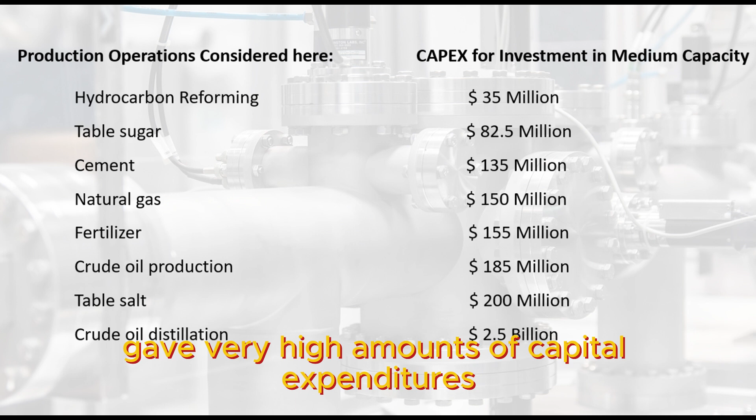The YouTube video titled 'From Molecules to Millions: The Chemistry, Process Flows and ROI of Industries and Their Utilized Raw Materials, Part 1' is the prerequisite for this video. This is because that video gave very high amounts of capital expenditures, CAPEX, for their investment.

It was shown that the cost for a medium investment in these industries, when arranged in order of increasing CAPEX, are hydrocarbon reforming, table sugar, cement, natural gas, fertilizer, crude oil production, table salt, and crude oil distillation, with the actual amounts of $35 million,

$82.5 million, $135 million, $150 million, $155 million, $185 million, $200 million, and $2.5 billion respectively. The amount of money for each process is enormous.

So there is a need to create opportunities for more investors to be identified in the process, such as aiding the investment processes as follows.

1. Reducing the high capex barrier. This involves collaborative financing through joint ventures between SMEs and larger firms, sharing the capex burden.

2. Concentration of risk. A single entity bears the full funding burden, and there are identified delays to break even if any one stage underperforms.

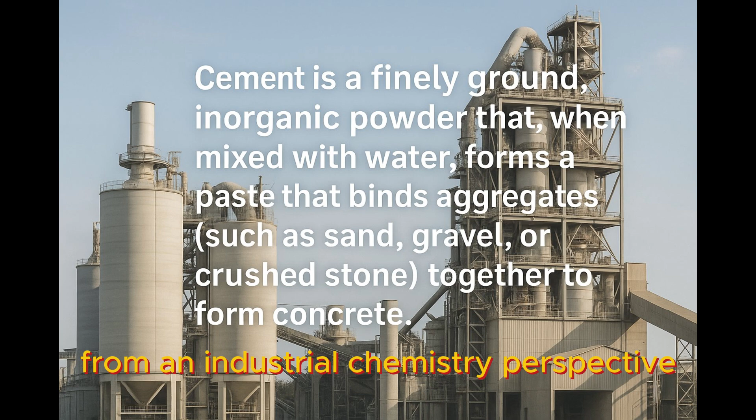From an industrial chemistry perspective, cement is a finely ground, inorganic powder that, when mixed with water, forms a paste that binds aggregates, such as sand, gravel, or crushed stone, together to form concrete.

The processes are as described in the process flow diagram shown here, and stages of production are grouped into 8 as follows: 1. Raw materials extraction. 2. Crushing and grinding. 3. Mixing and blending. 4. Preheating and calcination. 5. Clinker formation. 6. Cooling and storage. 7. Final grinding. 8. Packaging and distribution.

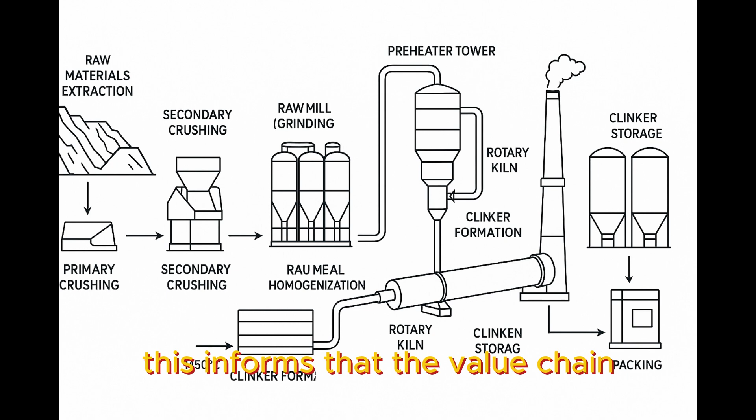This informs that the value chain in cement production will be built across the 8 stages mentioned, as described in the subsequent section. By unbundling these 8 stages, entrepreneurs can plug into the cement ecosystem at the scale they can afford, share infrastructure burdens, and build profitable, capital-efficient ventures with clear exit or scaling pathways.

2.1 Value chains in cement production. 1. Raw materials extraction. Business: quarry and sell crushed limestone, marl, clay for cement feed or construction aggregates.

Processes and operations: geological survey and test drilling, drilling and blasting, excavation and hauling to primary crusher, stockpiling and quality sampling. Equipment and materials: drill rig with compressor, explosives and accessories, hydraulic excavators with 2 to 3 cubic meter buckets, 600 TPH jaw crusher.

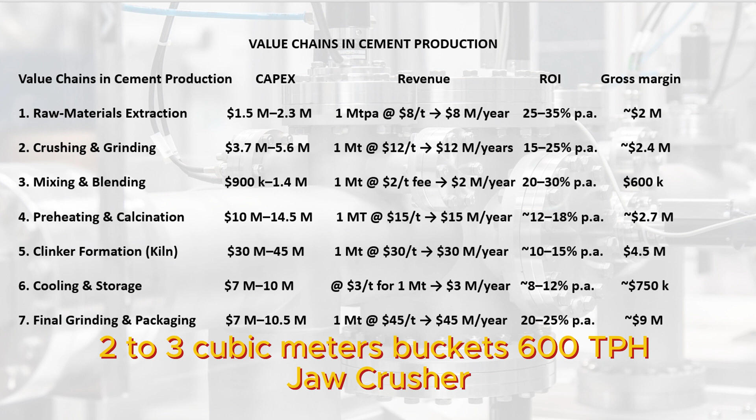2 by 30 T-tipper trucks, quality lab kit, XRF portable. CAPEX: site prep, permits and survey, $300K-$500K; crusher and haulage fleet, $1M-1.5M; stockpile infrastructure, bund walls, conveyors, $200K-$300K.

Total $1.50M-2.3M. Revenue and ROI: 1 million tons per annum at $8 per ton equals $8 million per year. Gross margin 25%, net $2M. ROI 25-35% per annum. Payback 3-4 years.

2. Crushing and grinding, raw meal production. Business: crush and mill raw materials into fine raw meal for cement kilns. Processes and operations: secondary crushing with cone/roll crushers.

Drying with hot gas ring dryer. Raw meal grinding via VRM or ball mill. Airslide conveyors to silos. Equipment and materials: 800 TPH cone crusher plus feeders, hot gas ring dryer at 20 TPH, vertical roller mill at 150 TPH, or 2 by 30 TPH ball mills.

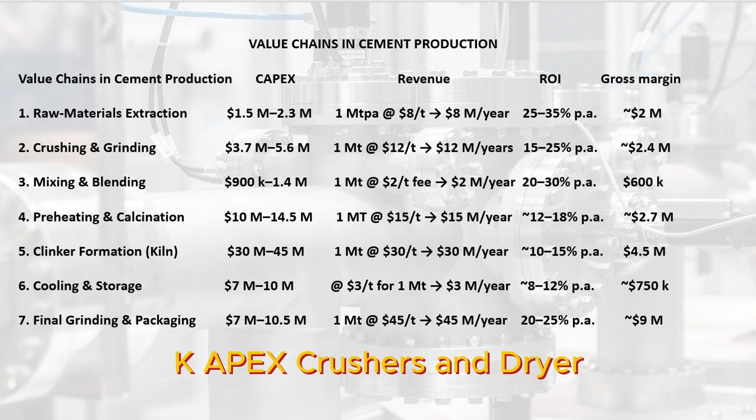Dust collector and bag filters. Control system: PLC plus SCADA. CAPEX: crushers and dryer, $1.20M-1.8M; mills and filters, $2M-3.0M.

Conveyors and silos, $500K-$800K. Total $3.70M-5.6M. Revenue and ROI: sale of 1 million tons raw meal at $12 per ton equals $12 million per year. Gross margin 20%, net $2.4M. ROI 15-25% per annum. Payback 4-6 years.

3. Mixing and blending. Business: supply homogenized raw meal blends or specialty cement additive mixes. Processes and operations: weighfeeder batching of raw ingredients including limestone, clay, slag, fly ash; blending bed or silo homogenization using live bottom silos; sampling and QC for target chemistry.

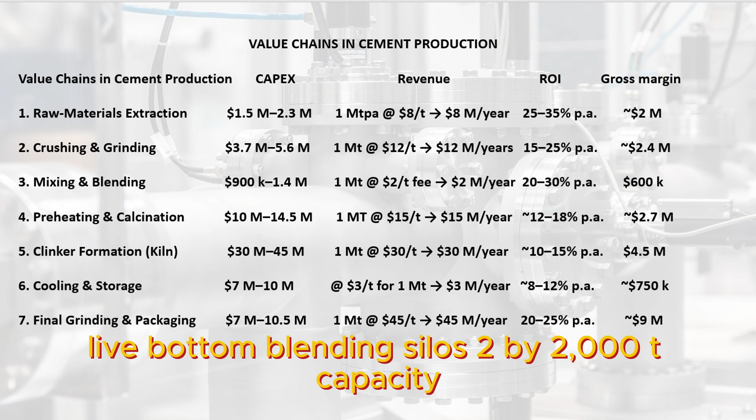Equipment and materials: multi-bin weigh feeders, 4 to 6 bins; live bottom blending silos, 2 by 2000 T capacity; screw conveyors and rotary valves; QC lab with XRF and moisture analyzer. CAPEX: feeders and conveyors, $300K-$500K.

Silos and structural steel, $500K-$700K. Lab setup, $100K-$200K. Total $900K-1.4M. Revenue and ROI: 1 million tons blended at $2 per ton fee equals $2 million per year. Gross margin 30%, net $600K. ROI 20-30% per annum. Payback 3-5 years.

4. Preheating and calcination. Business: operate a precalciner/preheater unit to sell partially calcined feed to clinkerizers.

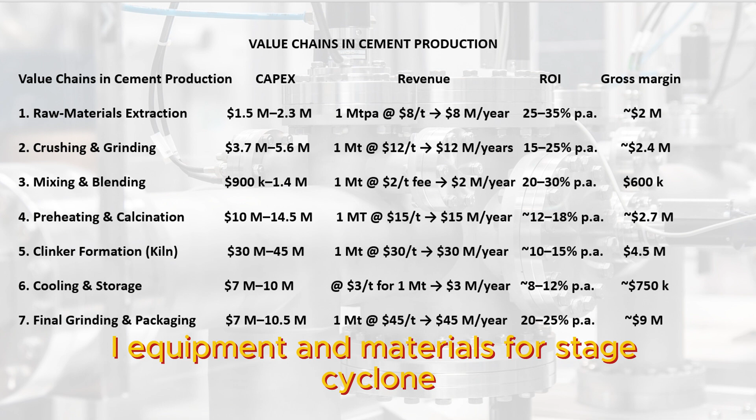Processes and operations: preheater tower with four stage cyclone, precalciner burner for 30-40% calcination, heat recovery to dryers/grinders. Equipment and materials: four stage cyclone preheater tower.

Precalciner burner and ducting. ID/FD fans and ESPs. Structural steel and refractory lining.

CAPEX: preheater tower and burner, $7M-10M; fans, ducts and ESP, $2M-3M; civil and steel works, $1M-1.5M. Total $10M-14.5M.

Revenue and ROI: 1 million tons precalcined at $15 per ton equals $15 million per year. Gross margin 18%, net $2.7M. ROI 12-18% per annum. Payback 6-8 years.

5. Clinker formation, kiln. Business: run a rotary kiln to sell clinker to grinding plants. Processes and operations: rotary kiln, 4 M x 60 M, at 1,450 degrees C.

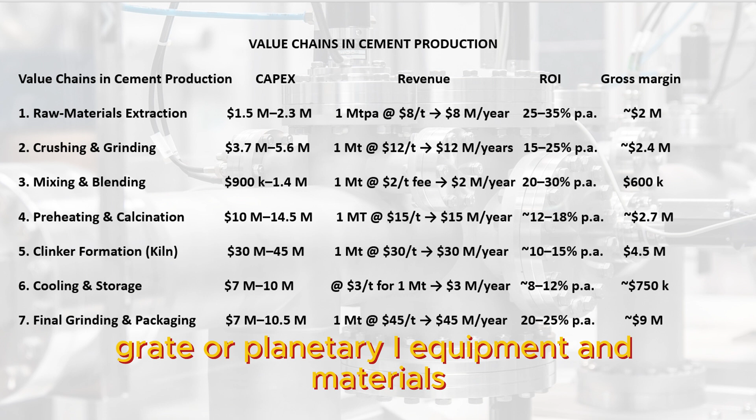Kiln drives, seals and refractory sections. Clinker cooler, grate or planetary. Equipment and materials: rotary kiln shell and drive, preheater and calciner integration, clinker cooler and transfer conveyor.

Fuel system for coal/petcoke handling. CAPEX: kiln and burner, $20M-30M; cooler and conveyors, $5M-7M; civil, refractory and spares, $5M-8M. Total $30M-45M.

Revenue and ROI: 1 Mt clinker at $30 per ton equals $30 million per year.

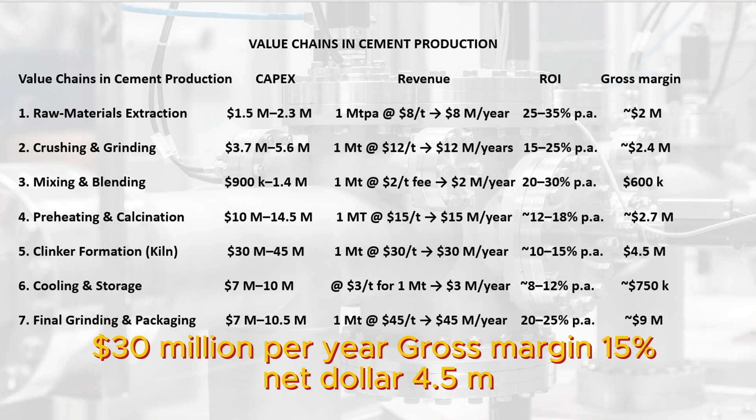Gross margin 15%, net $4.5 million. ROI 10–15% per annum. Payback 7–10 years. 6. Cooling and storage business.

Provide clinker cooling, storage silos, and just-in-time dispatch. Processes and operations: clinker cooler, if standalone, or storage buffer, high-capacity silos, 2 by 10,000 tons. Reclaimer and stacker bridges.

Equipment and materials: grate or planetary cooler retrofit, cylindrical steel silos plus roof and aeration, reclaimer conveyor and stacker boom.

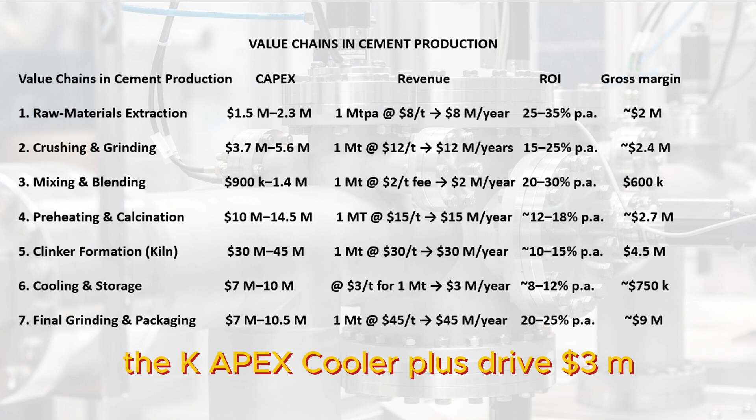CAPEX: cooler plus drive, $3M to $4M. Silos and reclaimer, $4M to $6M. Total, $7M to $10M.

Revenue and ROI. Handling fee at $3 per ton for 1 Mt, $3 million per year. Gross margin 25%, net $750K. ROI 8-12% per annum. Payback 8-10 years.

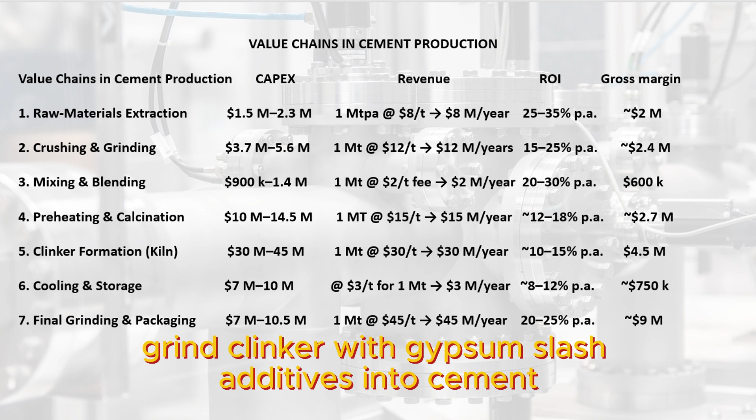7. Final grinding and packaging. Business: grind clinker with gypsum and additives into cement, bag and load for sale.

Processes and operations: finish grinding, VRM or ball mill plus classifier. Cement blending with additives, gypsum, slag. Bagging line, 25 to 50 kilograms, palletizing and wrapping. Bulk loading via tanker/truck.

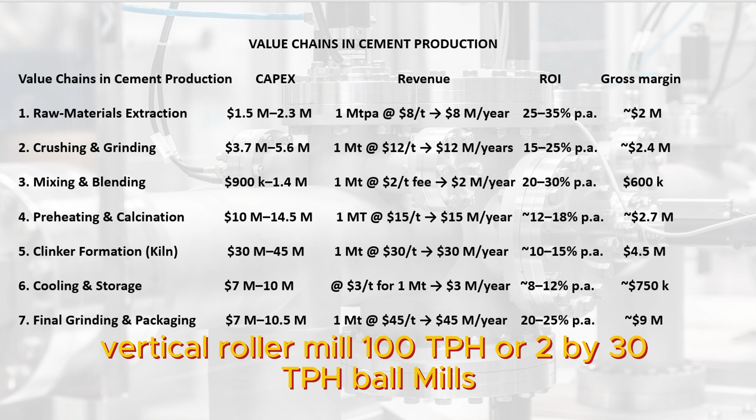Equipment and materials: vertical roller mill, 100 TPH, or 2 by 30 TPH ball mills. High efficiency classifiers and dust collectors. 2 by 20 bag/min bagging machines plus palletizer. Silos, 2 by 5000 tons, and bulk loading spout.

Low-CAPEX. Mills and classifier, $5M to $7M. Bagging and conveyors, $1M to $1.5M. Silos and civil, $1M to $2M. Total, $7M to $10.5M.

Revenue and ROI. 1 Mt cement at $45 per ton, $45 million per year. Gross margin 20%, net $9M. ROI 20-25% per annum. Payback 4-6 years.

3.0 Table salt production. Table salt, also known as sodium chloride, is a crystalline mineral composed of sodium (Na) and chloride (Cl) ions. Its chemical formula is NaCl.

Table salt is commonly used as a seasoning and preservative in food, and it's essential for various bodily functions, such as maintaining fluid balance and nerve function.

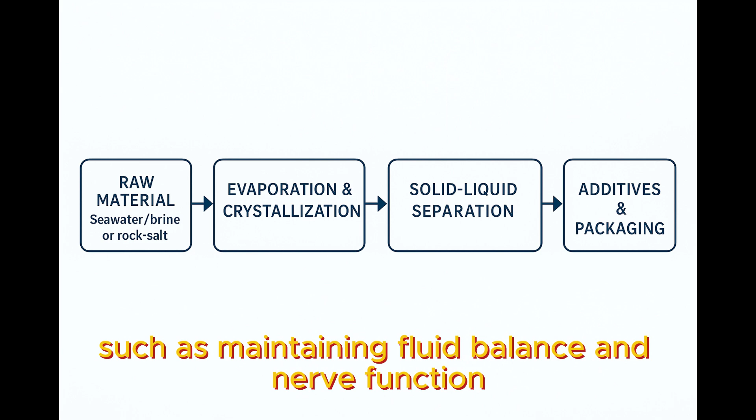The processes are as described in the process flow diagram shown here, and stages of production are grouped into 5 stages as follows: 1. Sources and purification of raw materials. 2. Concentration. 3. Solid-liquid separation. 4. Additives and packaging. 5. Distribution. This informs us that the value chain in table salt production will be built across the 5 stages mentioned, as described in the subsequent section.

3.1 Value chains in table salt production. 1. Sources and purification of raw materials. Produce crude salt, wet harvested or mine harvested, and deliver a washed, low impurity feed for downstream.

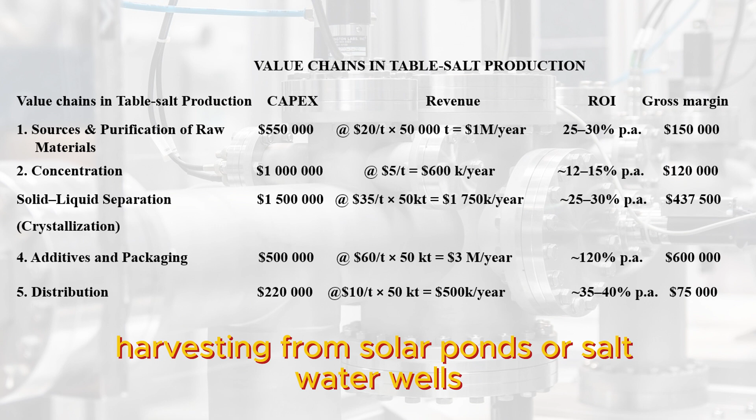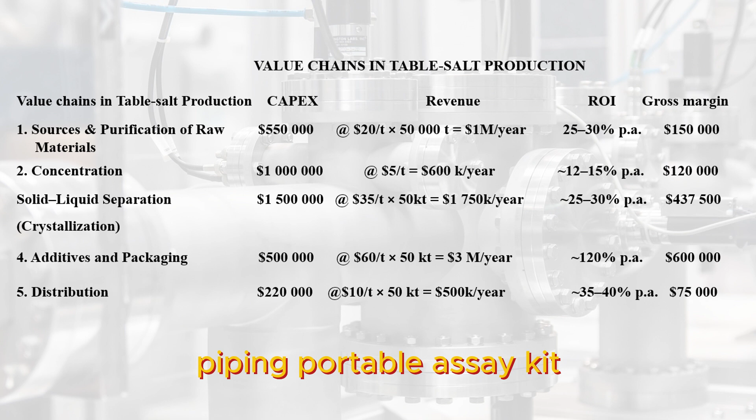Processes and operations include harvesting from solar ponds or saltwater wells, washing and settling to remove clays and insolubles, brine clarification via filtration or clarifiers. Equipment and materials include pond excavation and liners, if solar, or brine well pumps, settling tanks, sand media filters, slurry pumps, valves, piping, and a portable assay kit for conductivity and insoluble solids.

CAPEX, medium for a capacity investment of 50,000 tons per annum. Pond/lease development and permits, $200,000. Pumps and filtration skids, $250,000. Civil works and utilities, $100,000. Total is almost equal to

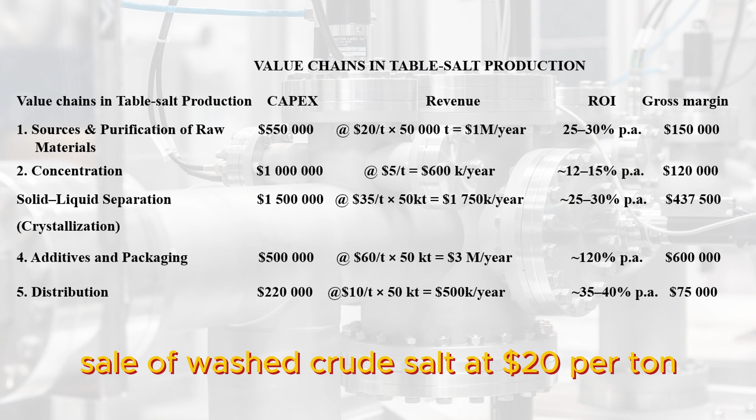$550,000. Revenue and ROI. Sale of washed crude salt at $20 per ton times 50,000 tons equals $1 million per year. Gross margin 15%, $150,000 net. ROI 25–30% per annum. Payback 3–4 years.

2. Concentration. Evaporate and concentrate brine to a high salinity feedstock for crystallizers. Processes and operations: solar evaporation via pond network, or mechanical vacuum evaporation, heat recovery if mechanical, and brine monitoring for TDS and temperature.

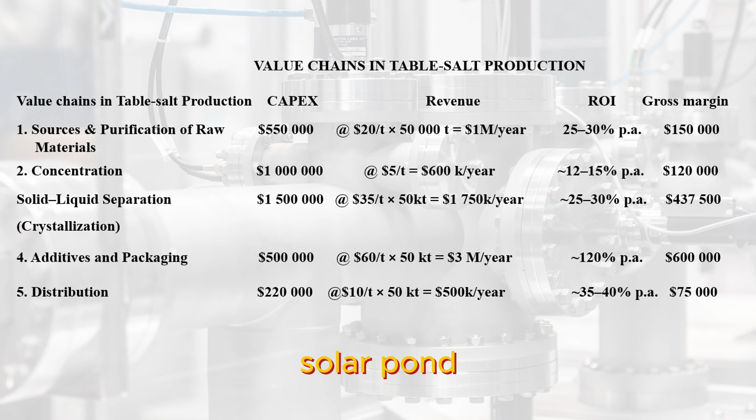Equipment and materials: solar pond earthworks and berms or vacuum evaporator units, circulation pumps, piping, flow meters, control panel, TDS sensors, level switches.

CAPEX, medium. Solar pond build and lining, $400,000. Pumps, piping and valves, $150,000. VacEvap system, optional, $450,000. Total, solar plus mechanical fallback, is almost equal to $1 million.

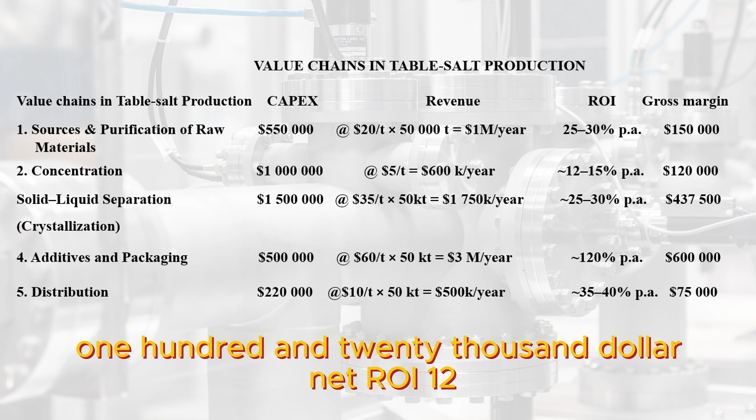Revenue and ROI. Service fee for 120,000 tons of brine at $5 per ton equals $600,000 per year. Gross margin 20%, $120,000 net. ROI 12–15% per annum. Payback 6–8 years. 3. Solid-liquid separation, crystallization.

Crystallize and separate salt crystals from concentrated brine. Processes and operations: vacuum pan or forced circulation crystallizers, centrifugation or decanting of mother liquor, drying and screening of wet salt.

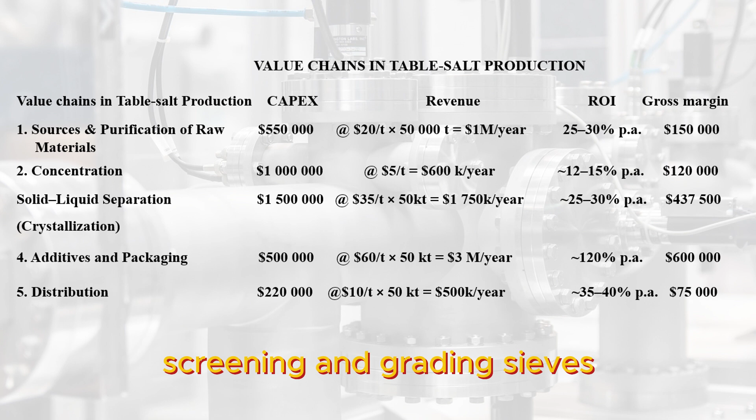Equipment and materials: vacuum pan crystallizers, 50 TPH capacity, basket centrifuges or horizontal decanters, rotary dryer or fluidized bed, screening and grading sieves. CAPEX, medium.

Crystallizers and centrifuges, $800,000. Dryers and screens, $400,000. Installation and controls, $300,000. Total is almost equal to $1,500,000. Revenue and ROI. Sale of coarse salt at $35 per ton times 50,000 tons equals

$1,750,000 per year. Gross margin 25%, $437,500 net. ROI 25–30% per annum. Payback 4–5 years.

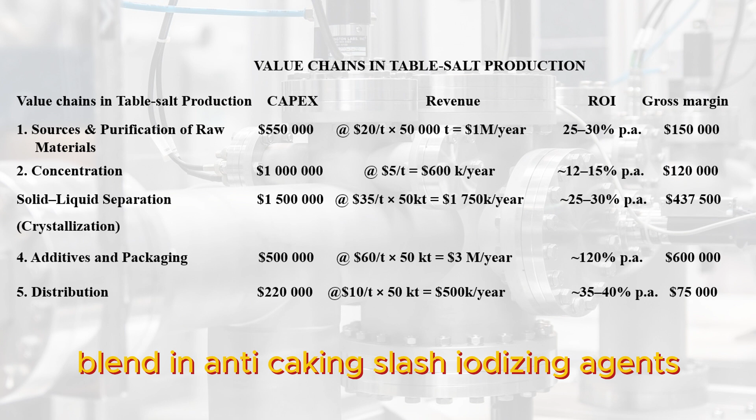4. Additives and packaging. Blend in anti-caking and iodizing agents and pack finished edible salt for retail. Processes and operations: iodization via spray or dry mix, anti-caking dosing with silicates and stearates, automated bagging at 25 or 50 kilograms, printing and palletizing.

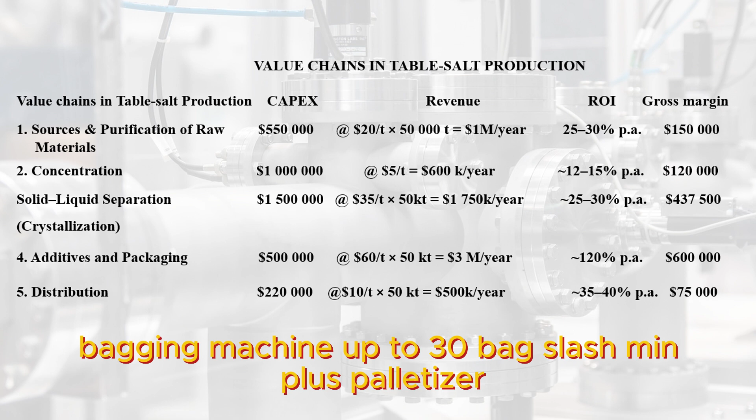Equipment and materials: precision weighbelt feeders, 3-bin, mixers and dosing skids, bagging machine up to 30 bags per minute plus palletizer, film or woven polypropylene bags, pallets, and stretch wrap.

CAPEX, medium. Dosing and mixing skids, $200,000. Bagging line and palletizer, $250,000. Packaging materials, initial stock $50,000. Total is almost equal to $500,000. Revenue and ROI.

Packaged salt sales at $60 per ton times 50,000 tons equals $3,000,000 per year. Gross margin 20%, $600,000 net. ROI 120% per annum, payback 1 year.

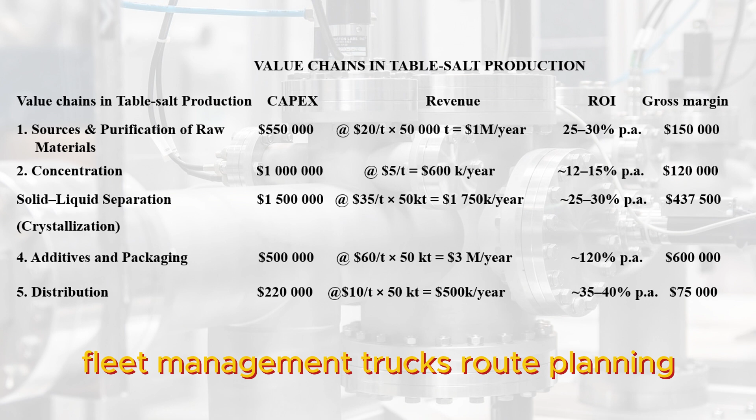5. Distribution. Warehouse, bulk truck delivery, or retail network for packaged salt. Processes and operations: bulk storage, silos or warehouse racks, fleet management, trucks, route planning, order management and retail/wholesale coordination. Equipment and materials: steel silos, 2 by 2,000 ton, or covered warehouse, 4 to 6 bulk salt trucks, 10 to 20 ton capacity, forklifts, loading spouts, scales.

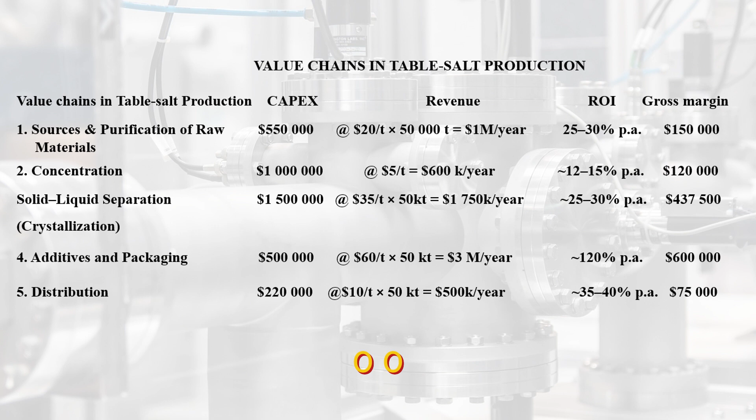TMS/ERP for orders and invoicing. CAPEX, medium: silos/warehouse and racking, $100,000. Trucks and forklifts, $100,000. IT and office setup, $20,000. Total is almost equal to

$220,000. Revenue and ROI. Distribution margin at $10/ton times 50,000 ton equals $500,000 per year. Gross margin 15%, $75,000 net. ROI 35–40% per annum, payback 2–3 years.

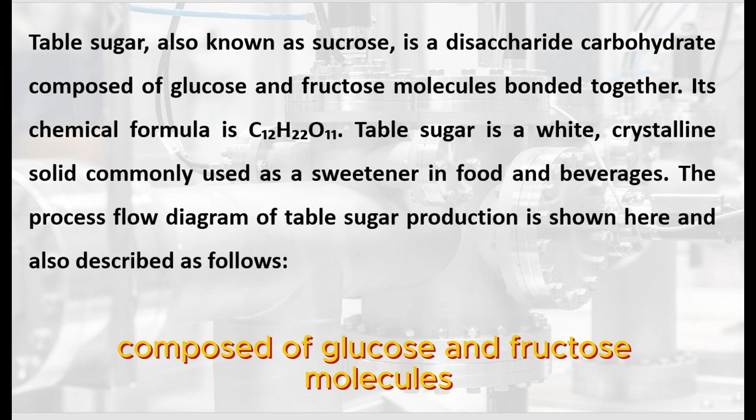4.0. Table sugar production. Table sugar, also known as sucrose, is a disaccharide carbohydrate composed of glucose and fructose molecules bonded together. Its chemical formula is C12H22O11. Table sugar is a white, crystalline solid commonly used as a sweetener in food and beverages.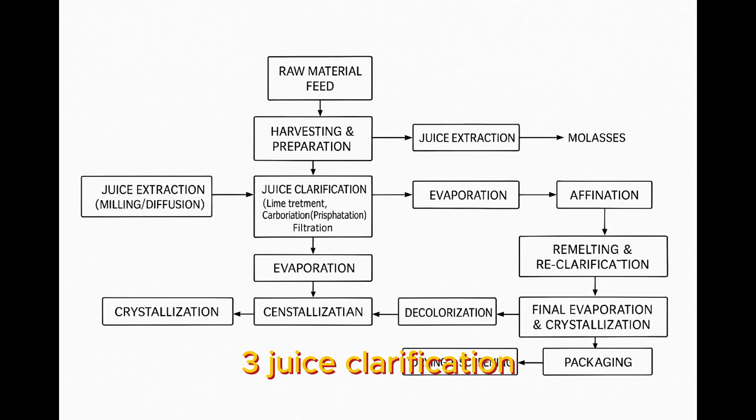The process flow diagram of table sugar production is shown here and also described as follows. The processes are as described in the PFD shown here, and stages of production are grouped into 7 stages as follows: 1. Harvesting and preparation. 2. Juice extraction. 3. Juice clarification. 4. Evaporation. 5. Crystallization, raw sugar. 6. Packaging. 7. Distribution. This informs that the value chain in table sugar production will be built across the 7 stages mentioned, as described in the subsequent section.

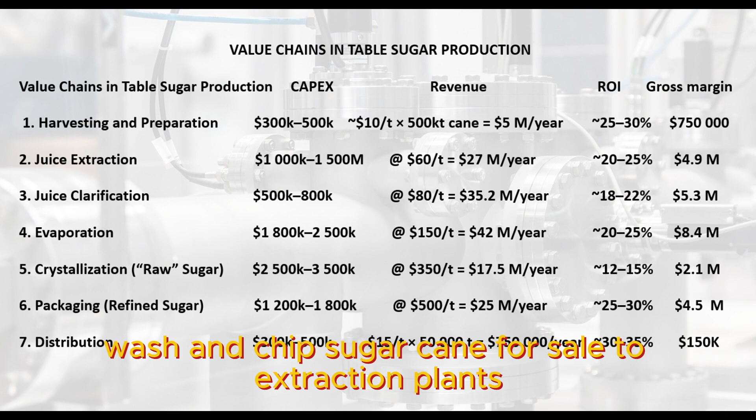4.1. Value chains in table sugar production. 1. Harvesting and preparation. Business: aggregate, wash and chip sugarcane for sale to extraction plants. Processes and operations: cane reception, washing and debris removal, chopping or shredding into billets. Equipment and materials: cane receiving hopper and washer, mechanical chipper or shredder, feed conveyors, pumps.

CAPEX $300,000 to $500,000. Revenue and ROI: toll fee $10/ton times 500,000 ton cane equals $5 million per year. Gross margin 15%, net $750,000. ROI 25–30%, payback 3–4 years.

2. Juice extraction. Business: operate a cane diffuser/mill plant to sell raw juice. Processes and operations: roller mills or diffuser units for fiber separation, juice collection and screening. Equipment and materials: 2-stage roller mill or 6-cell diffuser, juice screens and collection tanks, pumps, piping, PLC control panel.

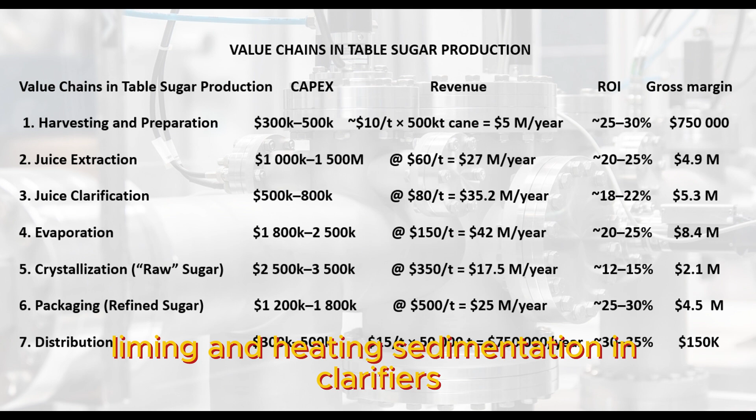3. Juice clarification. Business: clarify raw juice into clean, sediment-free feed for evaporators. Processes and operations: liming and heating, sedimentation in clarifiers, filtration, vacuum or pressure. Equipment and materials: clarifier tanks, 2 to 3 cells, rotary vacuum filters or plate filters, steam coils, agitators, dosing skid, lime. CAPEX $500,000

to $800,000. Revenue and ROI: clarified juice, 440,000 tons/year, at $80 per ton equals $35.2 million per year. Gross margin 15%, net $5.3 million. ROI 18–22%, payback 4–6 years.

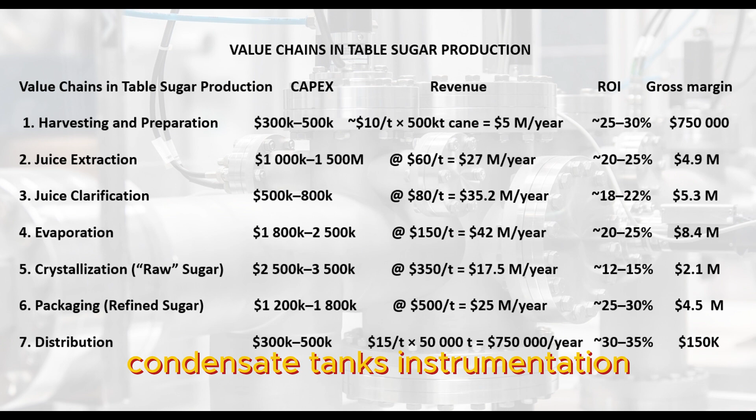4. Evaporation. Business: concentrate clarified juice into thick syrup, 60-degree brix. Processes and operations: multi-effect evaporation, 3 to 4 effects, vapor recompression and heat recovery. Equipment and materials: 3-effect evaporator trains, heat exchangers, recompression fan, pumps, condensate tanks, instrumentation.

CAPEX $1,800,000 to $2,500,000. Revenue and ROI: syrup, 280,000 t/year, at $150 per ton equals $42 million per year. Gross margin 20%, net $8.4 million. ROI 20–25%, payback 4–5 years.

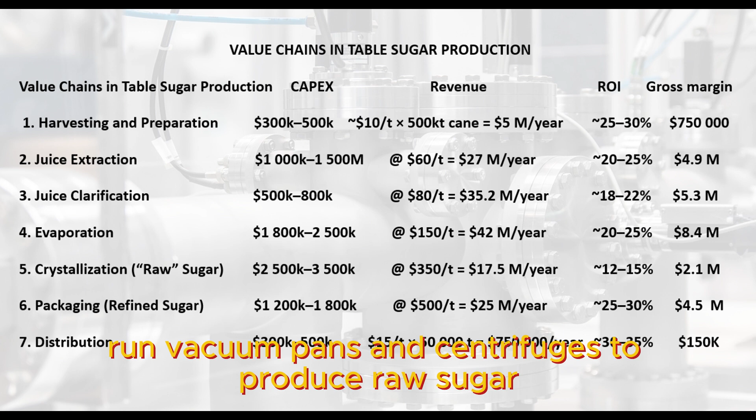5. Crystallization, raw sugar. Business: run vacuum pans and centrifuges to produce raw sugar. Processes and operations: batch pan crystallization, centrifugal separation of crystals and molasses. Equipment and materials: 4 to 6 vacuum pans, 10 to 15 ton pan, basket centrifuges or horizontal decanters, steam heaters, molasses receivers.

CAPEX $2,500,000 to $3,500,000. Revenue and ROI: raw sugar, 50,000 tons/year, at $350 per ton equals $17.5 million per year. Gross margin 12%, net $2.1 million. ROI 12–15%, payback 6–8 years.

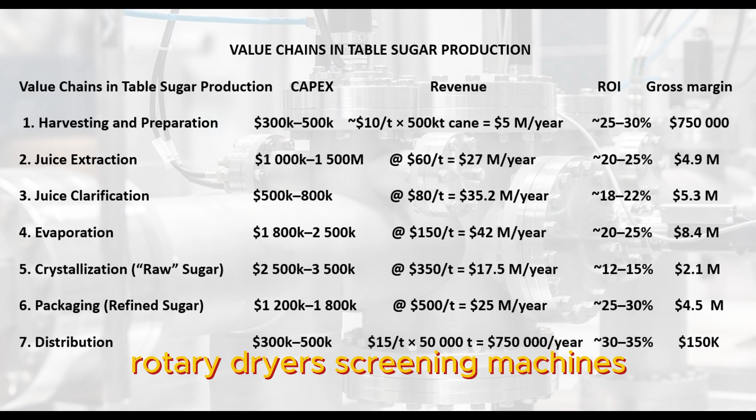6. Packaging, refined sugar. Business: refine, blend and pack edible sugar for retail/wholesale. Processes and operations: carbonation or phosphatation refining, drying, screening, color polishing, bagging into 50 kilogram bags or retail packs. Equipment and materials: decolorization tanks, bone char or ion exchange, rotary dryers, screening machines, automatic bagging line plus palletizer.

CAPEX $1,200,000 to $1,800,000. Revenue and ROI: packaged sugar, 50,000 t/year at $500 per ton equals $25 million per year. Gross margin 18%, net $4.5 million.

ROI 25–30%, payback 3–4 years.

7. Distribution business: warehousing and last-mile delivery of packaged sugar. Processes and operations: bulk storage, silos or rack warehousing. Fleet management and route optimization. Order processing and invoicing.

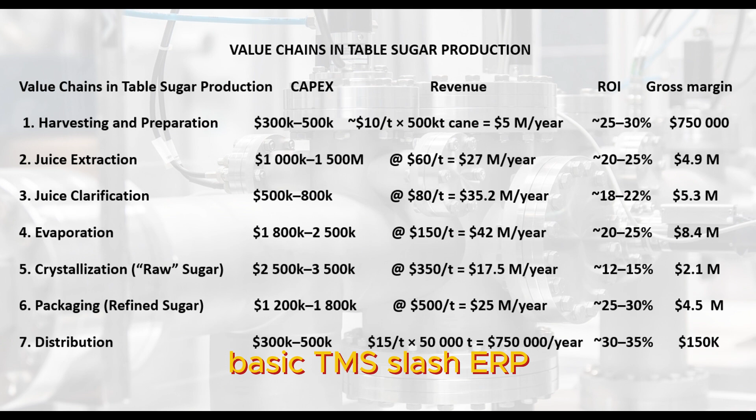Equipment and materials: steel silos, 2x2000T, or racked warehouse, 4 to 6 delivery trucks at 15 to 20 ton capacity. Forklifts, scales, basic TMS/ERP.

CAPEX $300,000–500,000. Revenue and ROI: Distribution fee $15 per ton times 50,000 T equals $750,000 per year. Gross margin 20%, net $150,000. ROI 30–35%, payback 2–3 years.

5.0 Production of ammonia-based fertilizer. Fertilizers are agrochemicals used in modern agriculture to enhance crop production by improving soil fertility.

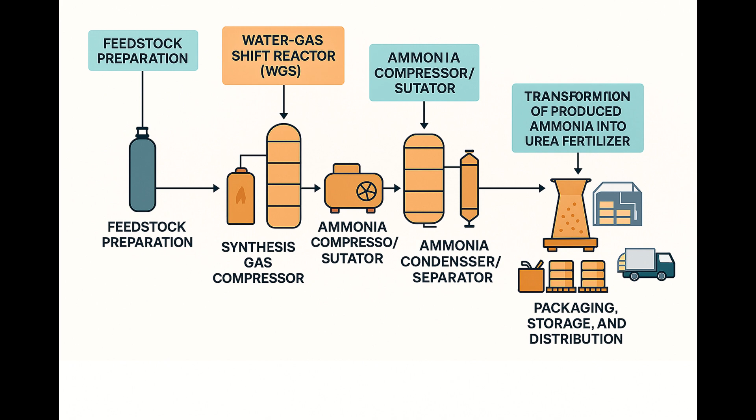1. Feedstock preparation. 2. Water gas shift reactor, WGS. 3. Synthesis gas compressor. 4. Pressure swing adsorption, PSA, hydrogen purification. 5. Ammonia synthesis reactor.

6. Ammonia compressor/scrubber. 7. Ammonia condenser/separator. 8. Transformation of produced ammonia into urea fertilizer. 9. Packaging, storage, and distribution.

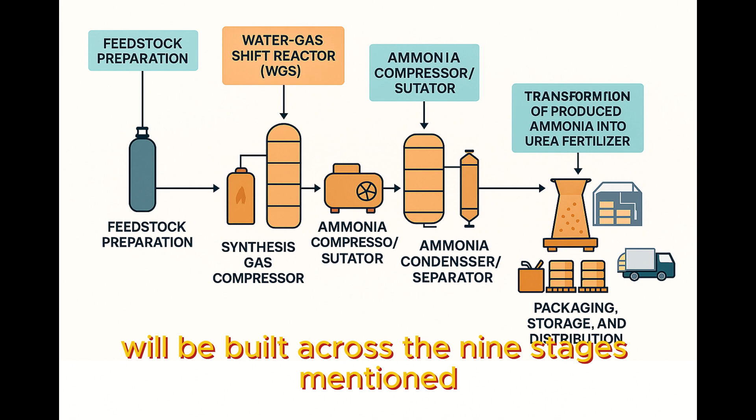This informs us that the value chain in ammonia-based fertilizer production will be built across the 9 stages mentioned, as described in the subsequent section.

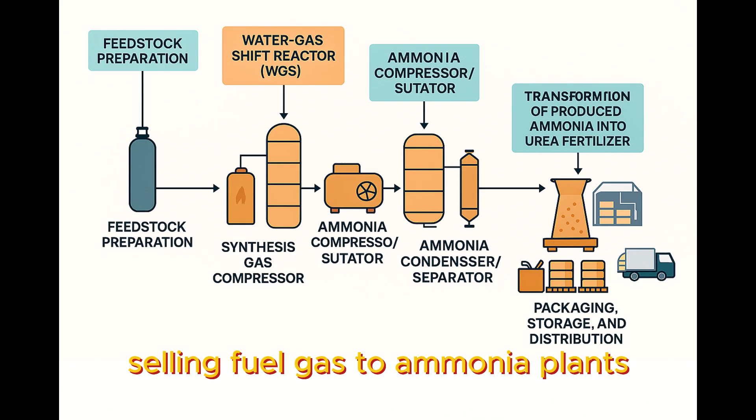5.1 Value chains in ammonia-based fertilizer production. 1. Feedstock preparation: gas sweetening and dehydration. Opportunity: build and operate a natural gas purification unit, selling fuel gas to ammonia plants.

Processes and operations: amine scrubbing, H2S/CO2 removal, molecular sieve dehydration to 1 ppm H2O. Equipment and materials: amine contactor/regenerator columns, heat exchangers, pumps, molecular sieve towers.

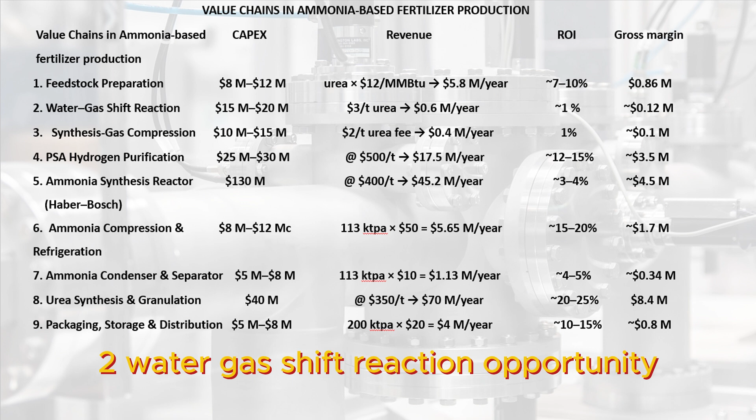2. Water gas shift reaction. Opportunity: operate a WGS train to convert purified gas into H2-rich syngas. Processes and operations: HT shift at 350 to 450 degrees Celsius plus LT shift at 200 to 250 degrees Celsius.

Interstage heat recovery. Equipment and materials: 2 to 3 shift reactors with Fe, Cr and Cu Zn catalysts, heat exchangers, valves. CAPEX $15 million to $20 million. Revenue and ROI: service fee $3 per ton urea, $0.6 million per year. Net $0.12 million, ROI 1%.

Niche, heavy integration needed. 3. Synthesis gas compression. Opportunity: provide multi-stage compression to 200 to 350 bar for the Haber-Bosch loop. Processes and operations: 3 to 5 stage reciprocating/centrifugal compression, intercooling and pulsation control.

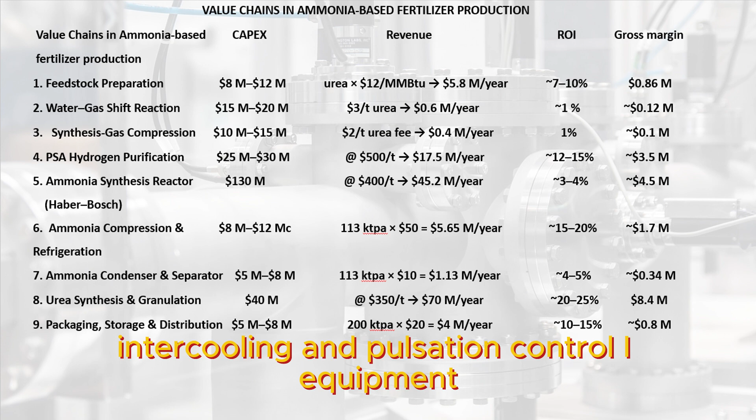Equipment and materials: compressors, intercoolers, pulsation dampeners. CAPEX $10 million to $15 million. Revenue and ROI: $2 per ton urea fee, $0.4 million per year. Net $0.1 million, ROI 1%.

4. PSA hydrogen purification. Opportunity: build PSA units to separate H2 for ammonia or sell to external markets. Processes and operations: pretreatment, CO2 removal, drying, PSA cycles, adsorption/desorption. Equipment and materials: 4 to 6 PSA vessels, compressors, filters. CAPEX $25 million to $30 million.

Revenue and ROI: sell 35 ktpa H2 at $500 per ton equals $17.5 million per year. Net $3.5 million, ROI 12-15%.

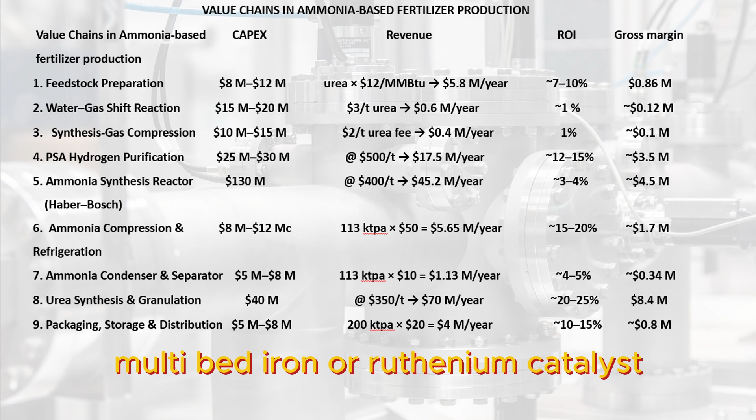5. Ammonia synthesis reactor, Haber-Bosch. Opportunity: operate an ammonia loop, selling NH3 to urea makers. Processes and operations: 150 to 250 bar, 400 to 500 degrees Celsius synthesis, multibed iron or ruthenium catalyst.

Equipment and materials: high pressure reactor, recycle compressor, separator. CAPEX at $650-1,600 per ton per annum NH3, for 113,000 ton per annum NH3 equals $73 million to $181 million. Assume $130 million.

Revenue and ROI: 113,000 ton NH3 at $400 per ton equals $45.2 million per year. Net $4.5 million, ROI 3-4%.

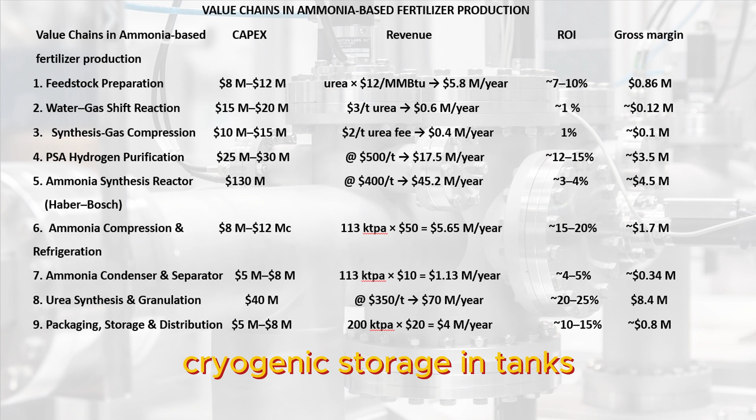6. Ammonia compression and refrigeration. Opportunity: provide liquefaction and cryostorage for NH3 logistics. Processes and operations: gas cooling to -33 degrees Celsius under pressure, cryogenic storage in tanks. Equipment and materials: multi-stage cryocompressors, cold box.

CAPEX $8 million to $12 million. Revenue and ROI: $50 per ton NH3 fee, 113,000 ton per annum times $50 equals $5.65 million per year. Net $1.7 million, ROI 15–20%.

7. Ammonia condenser and separator. Opportunity: supply condenser separator skids for NH3/H2 separation. Processes and operations: shell and tube condensers, knockout drums, separators. Equipment and materials: heat exchangers, separator vessels. CAPEX: $5 million to $8 million.

Revenue and ROI: $10 per ton NH3 fee, 113,000 ton per annum times $10 equals $1.13 million per year. Net $0.34 million, ROI 4–5%.

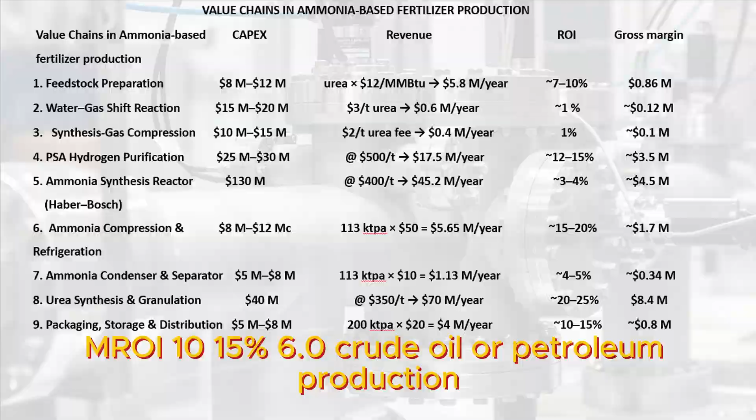6.0 Crude oil or petroleum production. Petroleum, or crude oil, is a complex mixture of hydrocarbons and other organic compounds. It's a viscous, dark-colored liquid found beneath the Earth's surface, extracted through drilling. Crude oil is a fossil fuel used as a primary energy source and feedstock for producing various petroleum products.

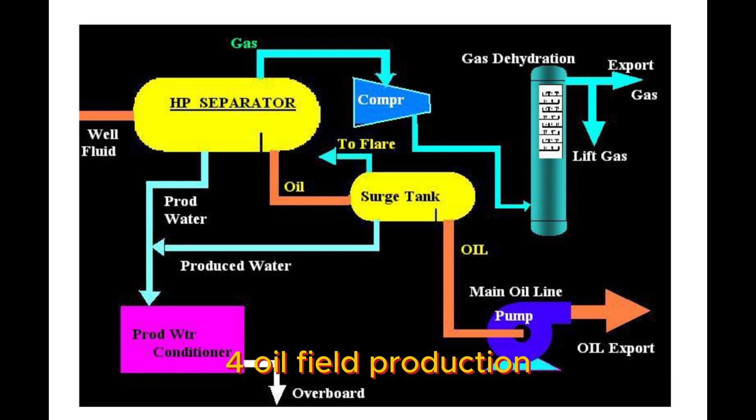The processes are as described in the process flow diagram (PFD) shown here, and stages of production are grouped into 7 stages: 1. Exploration by modern seismic application. 2. Drilling operations. 3. Crude oil production, well fluid transfer, 3-phase separation and crude stabilization. 4. Oil field production chemical management services. 5. Oil field laboratory service. 6. Consultancy services, environmental, calibration, waste management. 7. Storage and logistics services. This informs that the value chain in crude oil production will be built across the 7 stages mentioned, as described in the subsequent section.

6.1 Value chains in crude oil or petroleum production. 1. Exploration services, seismic survey. Business: conduct 2D/3D seismic acquisition and processing for upstream clients. Processes and operations: survey design and permitting, land clearing, line cutting, source point preparation, Vibroseis/accelerated weight drop acquisition, data QC, on-site processing, stacking, migration, interpretation. Equipment and materials: four Vibroseis trucks at $1 million each.

3,000 geophone nodes and cables, $200,000. Recording units and GPS, $150,000. Processing workstation and software licenses, $250,000. Field support vehicles and fuel, $200,000. CAPEX: equipment purchase $6 million, site setup and camp $500,000. Total is almost equal to $6.5 million.

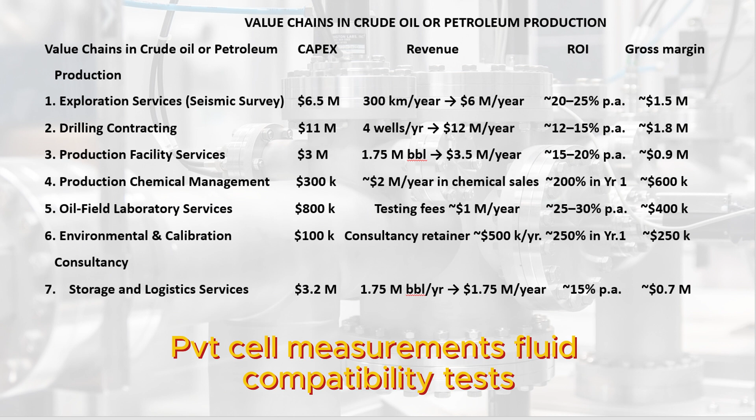5. Oilfield laboratory services. Business: operate on-site/off-site lab for fluid analysis, PVT studies and scale/corrosion testing. Processes and operations: sample reception and preservation, API gravity, water cut, BS&W testing, PVT cell measurements, fluid compatibility tests, reporting and data management.

Equipment and materials: GCMS or API approved fluid analyzers, $300,000. PVT cells and high pressure presses, $200,000. Viscometers, titrators, microscopes, $100,000. Lab fit-out and safety systems, $200,000. The CAPEX total is almost equal to $800,000. Revenue and ROI: testing fees $1 million per year.

Gross margin 40%, net $400K. ROI 25 to 30% per annum, payback 3 to 4 years.

6. Environmental and calibration consultancy. Business: provide EIA, equipment calibration, and waste management planning for oilfield operators. Processes and operations: baseline environmental surveys and reporting.

Calibration of flow meters, pressure gauges, and analyzers. Waste audit, disposal plan design, and regulatory liaison. Equipment and materials: field calibration kits and standards.

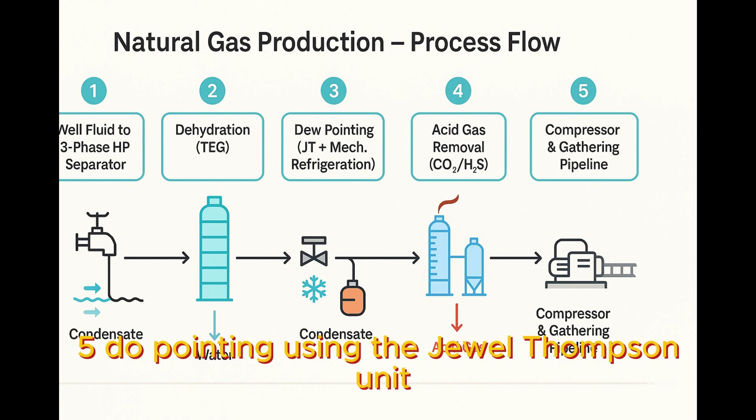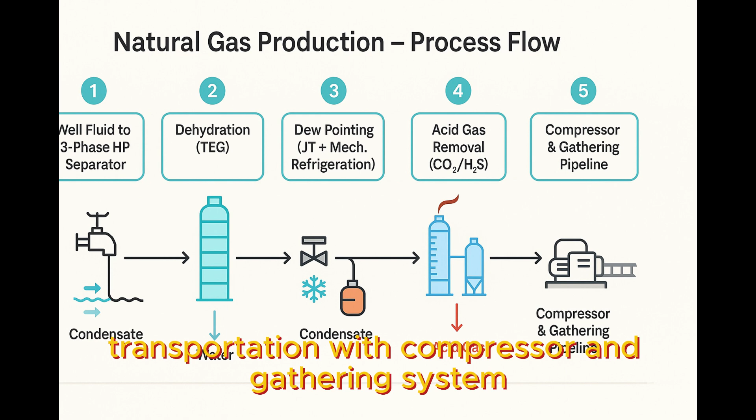5. Dew pointing using the Joule-Thomson unit and mechanical refrigeration system. 6. Chemical treatment for carbon dioxide and hydrogen sulfide removal. 7. Oil field laboratory service. 8. Laying of 15 kilometers of pipeline transportation with compressor and gathering system. 9. Consultancy services: environmental, calibration, waste management. This informs that the value chains in pipeline natural gas production will be built across the 9 stages mentioned, as described in the subsequent section.

7.1 Value chains in pipeline natural gas production. 1. Seismic exploration services. Business: 2D/3D land seismic acquisition and data processing for gas field appraisal. Processes and operations: survey design, permitting, and line cutting.

Vibroseis or weight drop source acquisition. On-site QC, off-site processing, stacking, migration, interpretation, and prospect recommendation. Equipment and materials: 4 Vibroseis trucks at $1 million each.

3,000 geophones, cables and recorders, GPS units, base stations and workstations, and processing software licenses. CAPEX $6 to $7 million. Revenue and ROI: $20,000 per line km times 300 kilometers per year equals $6 million per year. Net margin 25%, $1.5 million. ROI 20-25% per annum, 4 to 5 years payback.

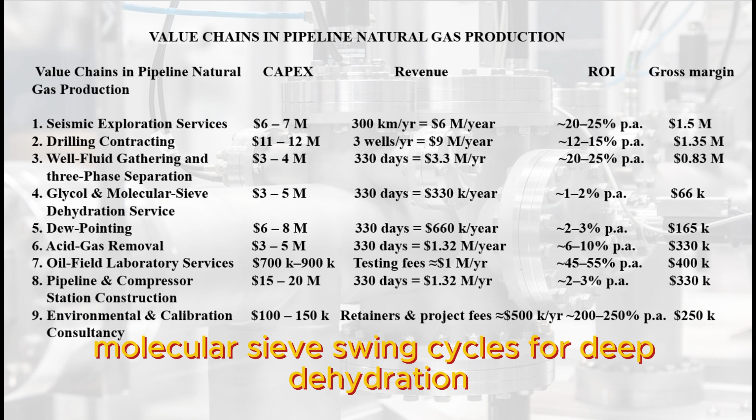4. Glycol and molecular sieve dehydration service. Business: remove water vapor to 1 part per million by volume H2O via TEG contactors and molecular sieve beds. Processes and operations: TEG absorption and regeneration loop, molecular sieve swing cycles for deep dehydration, heat integration and condensate handling.

Equipment and materials: TEG absorber/regenerator columns, molecular sieve vessels, heaters and controls, pumps, heat exchangers and piping. CAPEX $3 to $5 million.

Revenue and ROI: 5 cents per MSCF times 20 MMSCFD times 330 days equals $330,000 per year. Net margin 20%, $66,000. ROI 1-2% per annum, 20 to 30 year payback.

5. Dew pointing, Joule-Thomson and refrigeration. Business: lower gas dew point via JT expansion and mechanical refrigeration. Processes and operations: JT valve train for bulk cooling, refrigeration loop skid for fine dew point control, condensate separation and heat recovery.

Equipment and materials: JT valves, heat exchangers and vessels, refrigeration compressor, cold box and controls, liquid knockout drums and pumps. CAPEX $6 to $8 million.

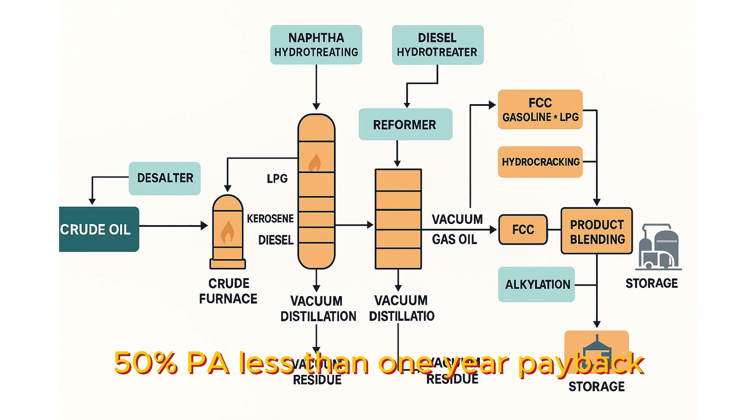8.0 Crude oil refinery operations. A crude oil refinery involves the use of the distillation technique of separation to separate crude oil into different fractions such as gasoline, kerosene, diesel, naphtha, etc. based on variation in their boiling points. The processes are as described in the process flow diagram, PFD, shown here, and stages of production are grouped into 8 stages as follows.

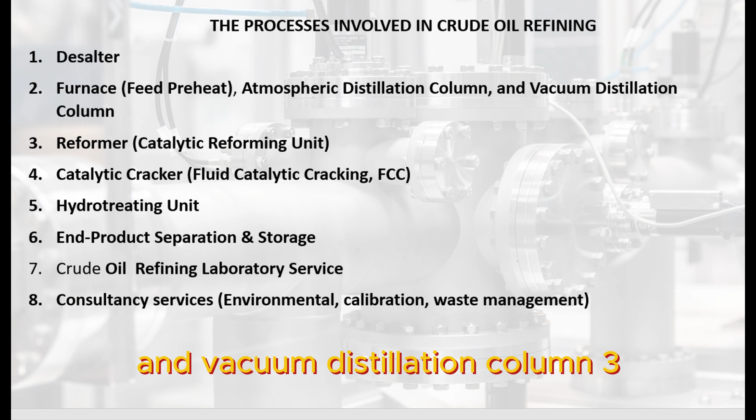1. Desalter. 2. Furnace, feed preheat, atmospheric distillation column and vacuum distillation column. 3. Reformer, catalytic reforming unit. 4. Catalytic cracker, fluid catalytic cracking, FCC. 5. Hydrotreating unit. 6. End product separation and storage. 7. Crude oil refining laboratory service. 8. Consultancy services, environmental, calibration, waste management.

This informs us that the value chain in crude oil refining operations will be built across the 8 stages mentioned, as described in the subsequent section. 8.1. Value chains in crude oil refinery operations.

1. Desalter services. Business: supply, install and operate electrostatic desalter skids to remove salts and water. Processes and operations: injection of wash water and demulsifiers, high voltage electrostatic separation of water/brine, sludge handling and disposal.

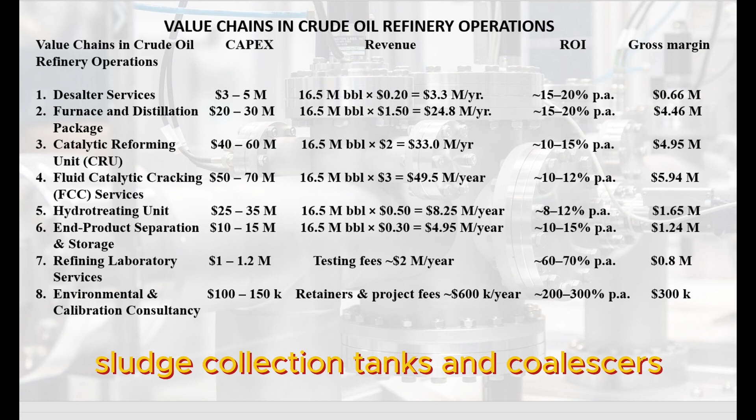Equipment and materials: 50,000 BPD desalter skid with HV transformer and electrodes, wash water injection pumps, control panels, sludge collection tanks and coalescers. CAPEX, $3 to $5 million.

Revenue and ROI: tolling fee 20 cents per BBL, 16.5 MBBL times 20 cents equals $3.3 million per year. Net margin 20%, $0.66 million. ROI 15–20% PA, 5 to 7 year payback.

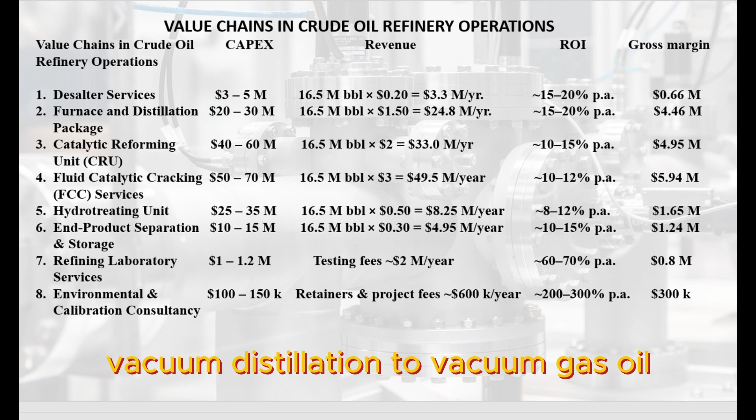2. Furnace and distillation package. Business: provide combined feed furnace skids plus atmospheric and vacuum columns on a toll processing basis. Processes and operations: crude preheat via fired heater and convection section, atmospheric distillation to C5, kerosene, gas oil cuts, vacuum distillation to vacuum gas oil (VGO) and resid.

Equipment and materials: fired heater, 50,000 BPD capacity with burners and radiant coils, 5 tray preheat exchangers, pump around loops, 40 x 60 foot ATM distillation column plus 16 x 40 vac column, vacuum pumps, condensers, reflux drums. CAPEX, $20 to $30 million.

Revenue and ROI: distillation fee $1.50 per BBL, 16.5 M times $1.50 equals $24.8 million per year. Net margin 18%, $4.46 million.

ROI 15 to 20% per annum, 5 to 7 year payback.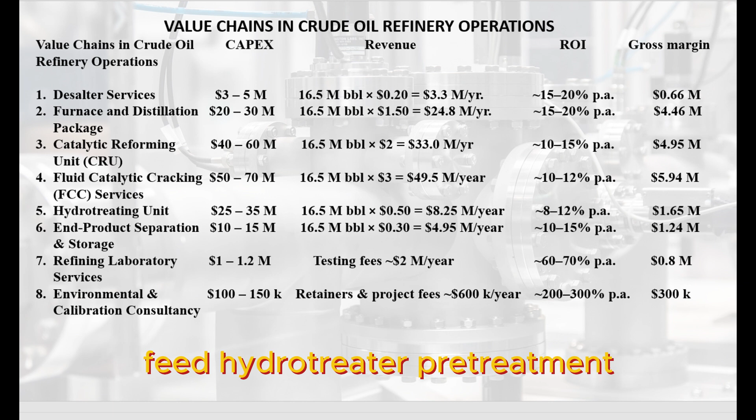3. Catalytic reforming unit (CRU). Business: toll process naphtha into high-octane reformate, benzene/toluene/xylenes feed. Processes and operations: feed hydrotreater pretreatment, optional. Fixed bed catalytic reforming, platinum/chloride on alumina, at 500 degrees C and 30 atm. Hydrogen recycle compression and heat recovery. Equipment and materials: 3 reactor train with feed effluent heat exchangers, high-pressure separator and hydrogen recycle compressor, sulfur guard and chloride dosing skids.

CAPEX, $40 to $60 million.

Revenue and ROI. Fee $2 per barrel, 16.5 million times $2 equals $33.0 million per year. Net margin 15%, $4.95 million. ROI 10 to 15% per annum, 6 to 8 years payback.

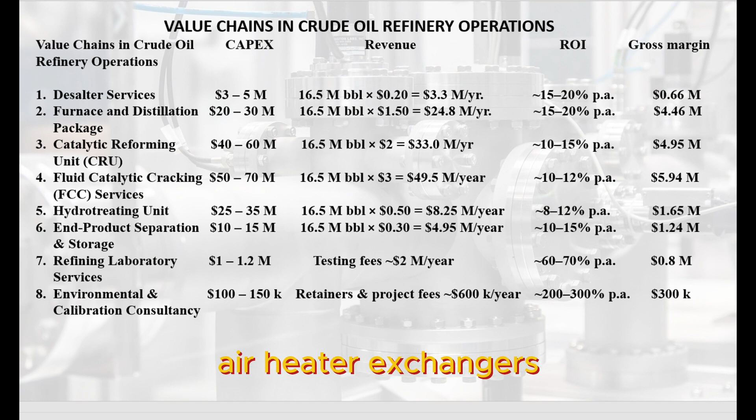4. Fluid catalytic cracking (FCC) services. Business: provide FCC catalyst supply, unit operation and regeneration on contract. Processes and operations: catalytic cracking of VGO/resid to LPG, gasoline, and light cycles. Regeneration for spent catalyst. Fractionation of FCC gasoline and light ends. Equipment and materials: FCC riser reactor and regenerator vessels, 50K barrel per day basis. Slide valves, cyclones, air heater exchangers. Fresh catalyst inventory and spent catalyst handling.

CAPEX, $50 to $70 million.

Revenue and ROI. Service fee $3 per barrel, 16.5 million times $3 equals $49.5 million per year. Net margin 12%, $5.94 million. ROI 10 to 12% per annum, 8 to 10 year payback.

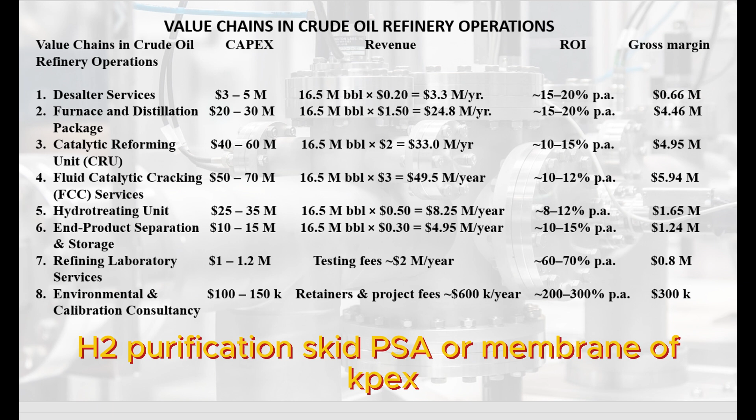5. Hydrotreating unit. Business: supply/hydrotreat naphtha, diesel, or kerosene to remove sulfur, nitrogen under H2. Processes and operations: feed preheat and mixing with H2. Fixed bed reactors over sulfide NiMo/CoMo catalysts at 300 to 400 degrees Celsius and 30 to 80 atm. Effluent separation, H2 recycle. Equipment and materials: two-stage reactors, feed/heater exchangers, high-pressure separator and hydrogen compressor, H2 purification skid, PSA or membrane.

CAPEX, $25 to $35 million.

Revenue and ROI. Tolling fee 50 cents per barrel, 16.5 million times 50 cents equals $8.25 million per year. Net margin 20%, $1.65 million. ROI 8 to 12% per annum, 7 to 9 year payback.

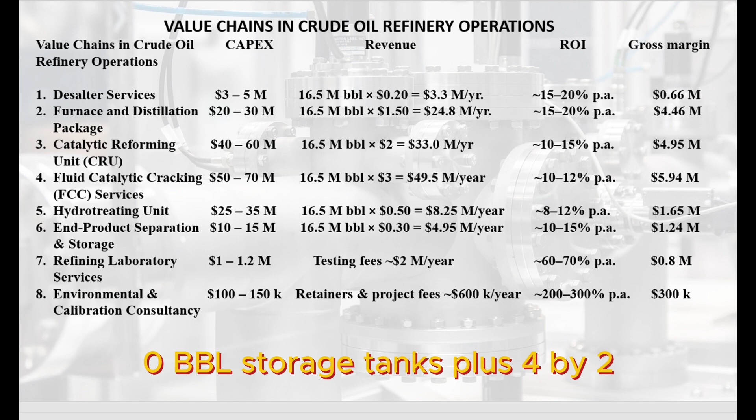6. End product separation and storage. Business: operate tank farm and final fractionation/blending/dispatch terminals. Processes and operations: LPG, naphtha, kerosene, diesel and vacuum gas oil blending. Storage in pressurized bullets and atmospheric tanks. Loading racks for truck, rail, or pipeline dispatch. Equipment and materials: 5 by 10,000 barrel storage tanks plus 4 by 2,000 barrel bullets. Blending skids, flow meters, pumps and vapor recovery. Loading arms, safety systems and control panels.

CAPEX, $10 to $15 million.

Revenue and ROI. Storage/blending fee 30 cents per barrel, 16.5 million times 30 cents equals $4.95 million per year. Net margin 25%, $1.24 million. ROI 10 to 15% per annum, 6 to 8 year payback.

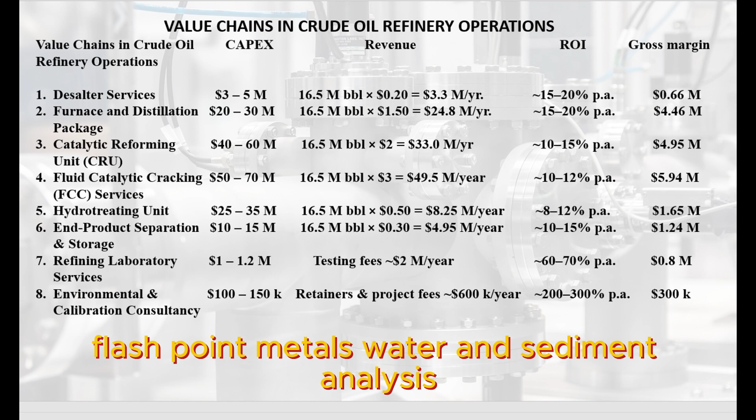7. Refining laboratory services. Business: on-site or off-site lab for crude and product quality assurance. Processes and operations: crude API gravity, sulfur, TAN tests. Distillation cuts, cetane/octane rating, flash point. Metals, water and sediment analysis, BS&W. Equipment and materials: GCMS, ASTM distillation apparatus, viscometers. Flash point testers, sulfur analyzers, balances. Sample prep hood, fume hoods and safety gear.

CAPEX, $1 to $1.2 million.

Revenue and ROI. Testing fees $2 million per year. Net margin 40%, $0.8 million. ROI 60 to 70% per annum, 1.5 year payback.

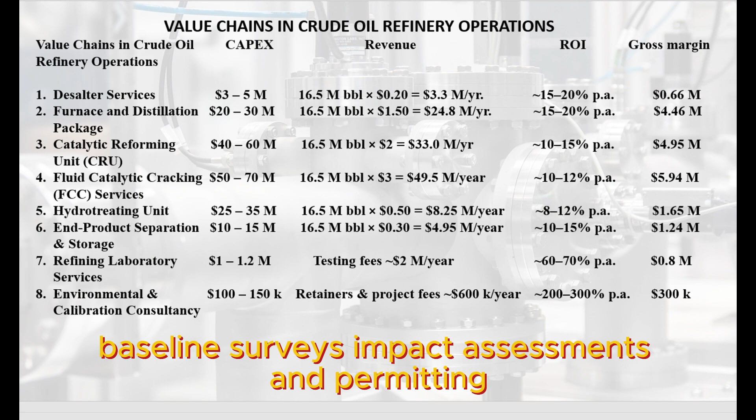8. Environmental and calibration consultancy. Business: provide EIAs, flow meter calibration, and waste management planning. Processes and operations: baseline surveys, impact assessments, and permitting. Calibration of custody transfer meters, gauges, and analyzers. Waste audit, disposal plan design, and compliance. Equipment and materials: calibration kits and certified standards. Sampling gear, air, water, soil, and GIS/reporting software.

CAPEX, $100,000 to $150,000. Revenue and ROI: retainers and project fees.

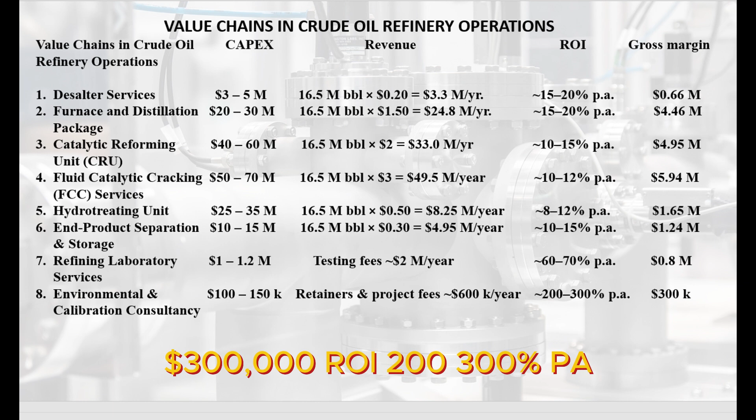$600K per year. Net margin 50%, $300,000. ROI 200 to 300% per annum, less than 1 year payback.

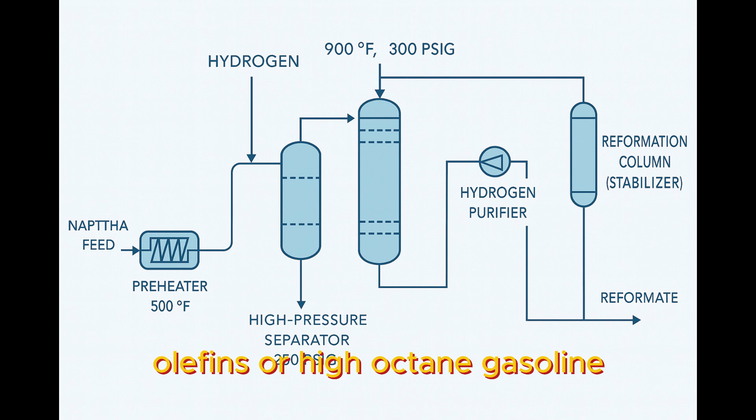9.0 Hydrocarbon reforming operations. Hydrocarbon reforming in petrochemical production refers to a set of processes used to rearrange or alter the structure of hydrocarbons. It is widely used in refining and petrochemical manufacturing to convert lower-value hydrocarbons, like naphtha, into more valuable products, such as aromatics, olefins, or high-octane gasoline. The processes are as described in the process flow diagram (PFD) shown here, and stages of production are grouped into 6 stages as follows.

1. Preheater and reactor section. 2. Effluent cooler and high-pressure separator. 3. Hydrogen purifier and recycle compressor. 4. Reforming column, stabilizer. 5. Analytical laboratory service. 6. Consultancy services: environmental, calibration, waste management.

This informs that the value chains in hydrocarbon reforming operations will be built across the 6 stages mentioned, as described in the subsequent section.

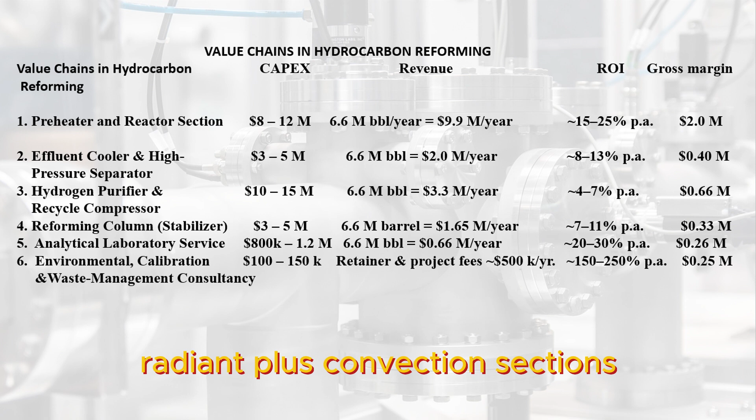9.1 Value chains in hydrocarbon reforming. 1. Preheater and reactor section. Business: toll process naphtha feed through fired heater and fixed bed reformer reactors. Processes and operations: crude/naphtha preheating in a fired heater, radiant plus convection sections. Catalytic reforming in a series of fixed bed reactors, platinum on aluminium oxide, 500 degrees Celsius, 20 to 30 bar. Interstage heat recovery.

Key equipment and materials: fired heater skid, 20,000 BPD capacity. 2 to 3 multitubular reformer reactor vessels plus catalyst charge. Feed/effluent exchangers, burners, control panels. CAPEX, $8 to $12 million.

Revenue and ROI. Toll fee: $1.50 per barrel times 6.6 million barrels per year equals $9.9 million per year. Net margin 20%, $2.0 million net. ROI 15 to 25% per annum, almost equal to 5 years payback.

2. Effluent cooler and high pressure separator. Business: provide cooling and phase separation of reactor effluent. Processes and operations: effluent quench/cool via exchanger or direct water quench, high pressure two-phase separation, flash knockout of light ends. Key equipment and materials: shell and tube cooler or quench skid.

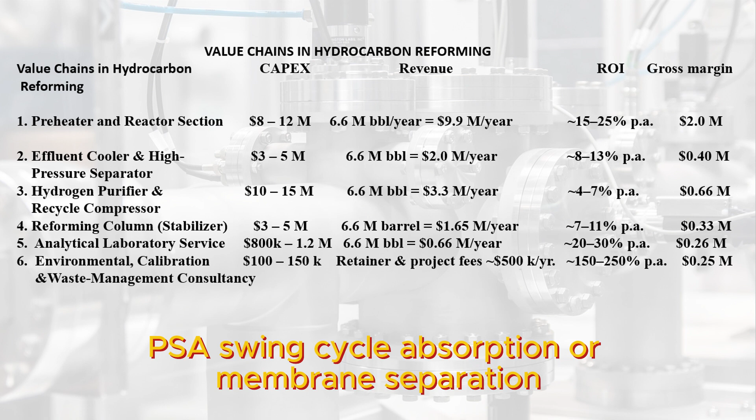3. Hydrogen purifier and recycle compressor. Business: purify hydrogen via PSA or membrane, and compress it back to reactor pressure. Processes and operations: PSA swing cycle adsorption or membrane separation for H2 purity greater than 99.5%. Multi-stage compression with intercooling to 20 to 30 bar. Instrument air and purge systems.

Key equipment and materials: PSA skids, 4 to 6 vessels, or membrane modules. Hydrogen recycle compressor, 5 to 8 megawatts, with intercoolers. Filter/separator vessels, control skid. Estimated CAPEX, $10 to $15 million.

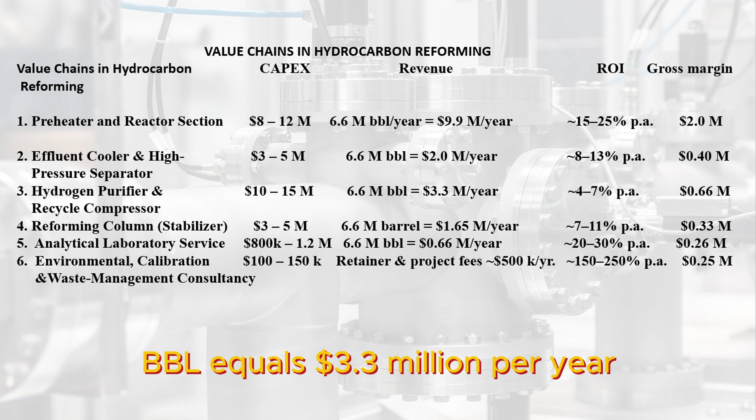Estimated revenue and ROI. Service fee: $0.50 per barrel times 6.6 million barrels equals $3.3 million per year. Net margin 20%, $0.66 million. ROI 4 to 7% per annum, almost equal to 9 years payback.

4. Reforming column, stabilizer. Business: strip light ends from reactor bottoms to produce stabilized reformate. Processes and operations: feed preheat via exchanger, fractionation in stabilizer column, tray or packed, reflux pumping and heat integration.

Key equipment and materials: 30-inch to 36-inch times 40-inch reformate stabilizer tower. Feed/overhead exchangers, reflux drum, pumps, reboiler, controls. Estimated CAPEX, $3 to $5 million.

Estimated revenue and ROI. Toll fee: $0.25 per barrel times 6.6 million barrels equals $1.65 million per year. Net margin 20%, $0.33 million. ROI 7 to 11% per annum, almost equal to 9 to 12 years payback.

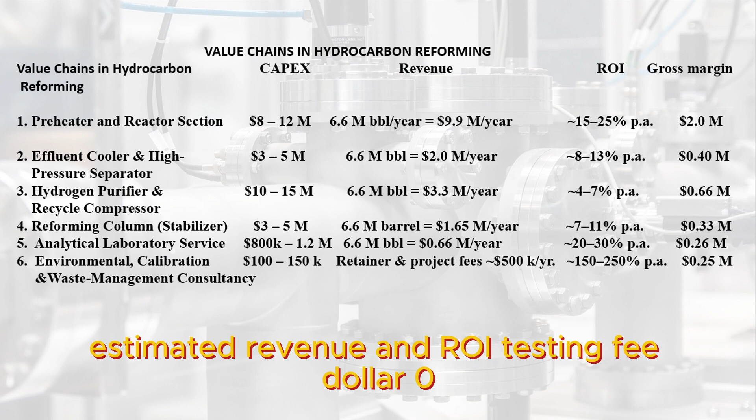Estimated revenue and ROI. Testing fee: $0.10 per barrel times 6.6 million barrels equals $0.66 million per year. Net margin 40%, $0.26 million. ROI 20 to 30% per annum, almost equal to 4 to 5 years payback.

6. Environmental, calibration and waste management consultancy. Business: EIAs, flow meter calibration, waste audit and disposal planning. Processes and operations: baseline environmental surveys and impact assessment, calibration of high-pressure flow meters, valves, analyzers, and waste stream audit, treatment proposals, and regulatory liaison.

Key equipment and materials: calibration kits, sampling gear for air, water, and soil, GIS/reporting software, field laptops. Estimated CAPEX, $100,000 to $150,000.

Estimated revenue and ROI. Retainer and project fees: $500K per year. Net margin 50%, $0.25 million. ROI 150 to 250% per annum, less than 1 year payback.